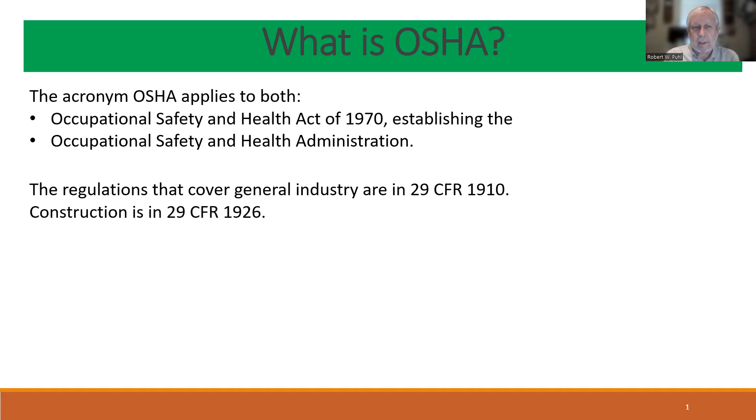The regulations that cover general industry are in 29 CFR 1910. Construction is 29 CFR 1926.

This means Title 29, Code of Federal Regulations, Part 1910, which is then divided into 20 subparts, A, B, C, etc. But usually the subparts aren't used in citing a regulation.

It's usually just 29 CFR 1910.147, the control of hazardous energy lockout tagout, for example, or just 1910.147. Any subpart, like Subpart S, is electrical.

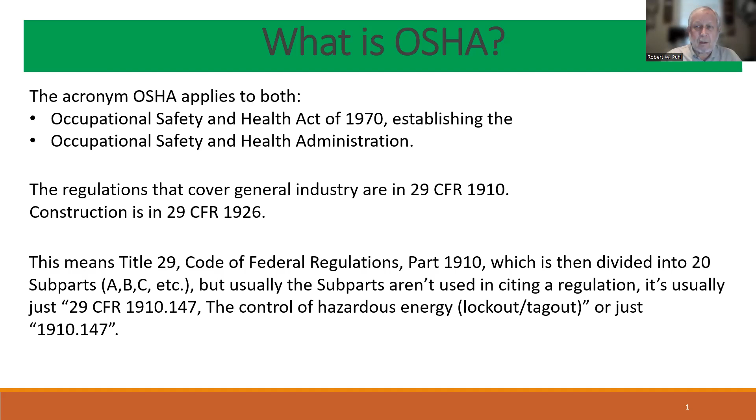So somebody might say, oh yeah, Subpart S, that's electrical. But generally speaking, the subparts aren't used that often.

Most of the time, safety professionals will deal with OSHA in two ways: OSHA regulations, many of which we'll cover in detail in this course, and OSHA inspections.

OSHA inspections are things that we just have to put up with. Again, they're not good or bad, they're just there and there for a reason. So if you have an OSHA inspection, you just have to deal with it.

Now, if you put a hard hat up to your ear, you can hear the OSHA. Maybe not.

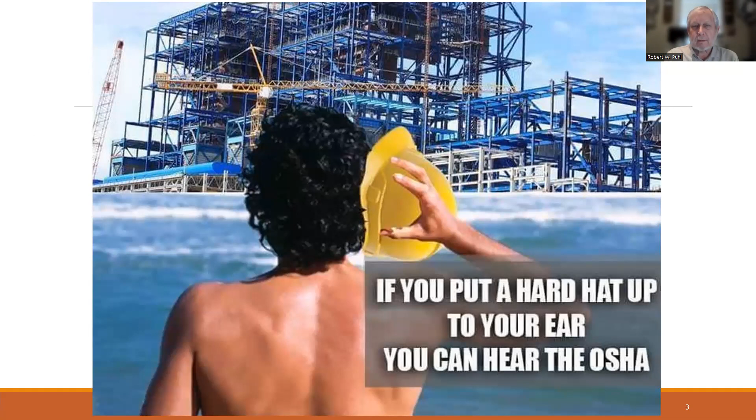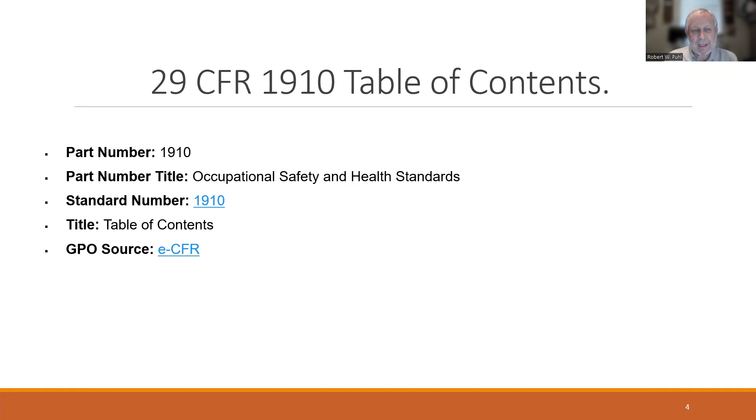So this is the 29 CFR 1910 table of contents. This is the part numbers, 1910. The part number title, Occupational Safety and Health Standards, is standard number 1910. And this is some other gobbledygook down here, table of contents in eCFR.

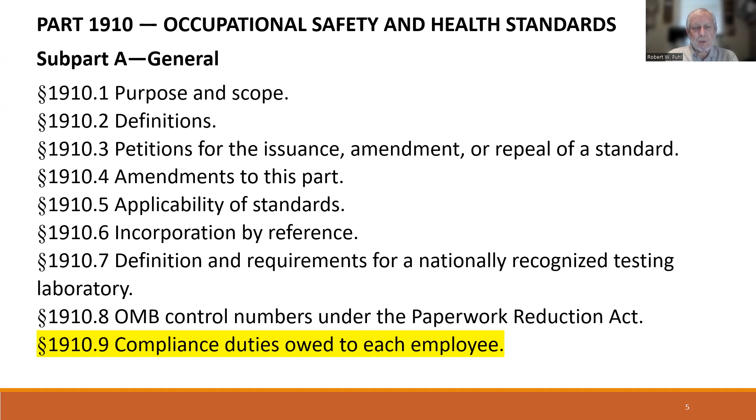So Part 1910, Subpart A is General. I'm not going to read all of this, but there's this compliance duties owed to each employee, which I thought was interesting. This is the whole 1910.9.

1910.9, paragraph A, personal protective equipment: standards in this part requiring the employer to provide personal protective equipment, including respirators and other types of PPE, because of hazards to employees, impose a separate compliance duty with respect to each employee covered by the requirement.

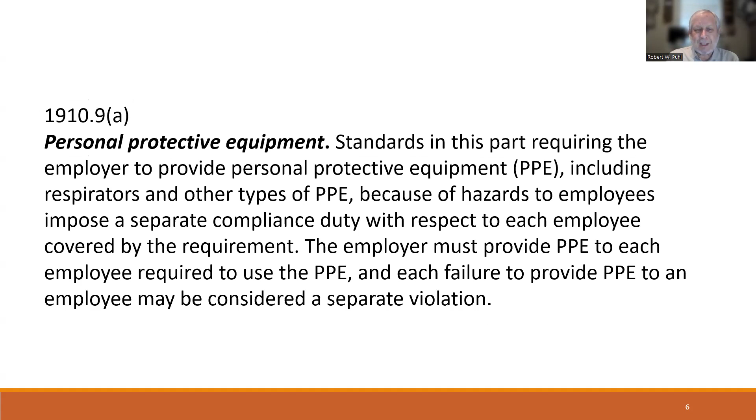The employer must provide PPE to each employee required to use the PPE, and each failure to provide PPE to an employee may be considered a separate violation.

Now, training. This is still 1910.9, paragraph B. There are only two paragraphs in it. Standards in this part requiring training on hazards and related matters, such as standards requiring that employees receive training, or that the employer train employees, provide training to employees, or institute or implement a training program, impose a separate compliance duty with respect to each employee covered by the requirement.

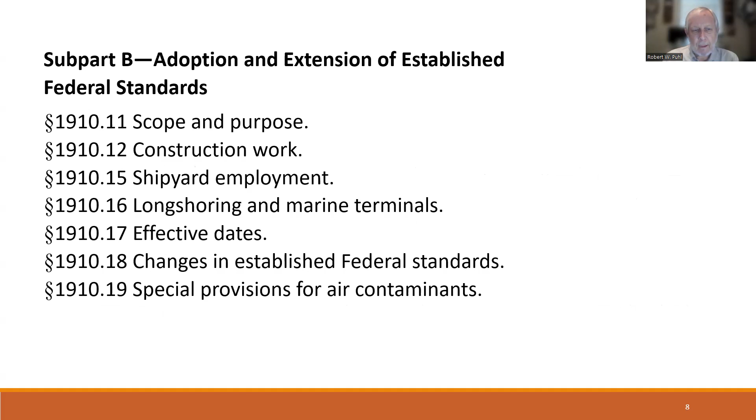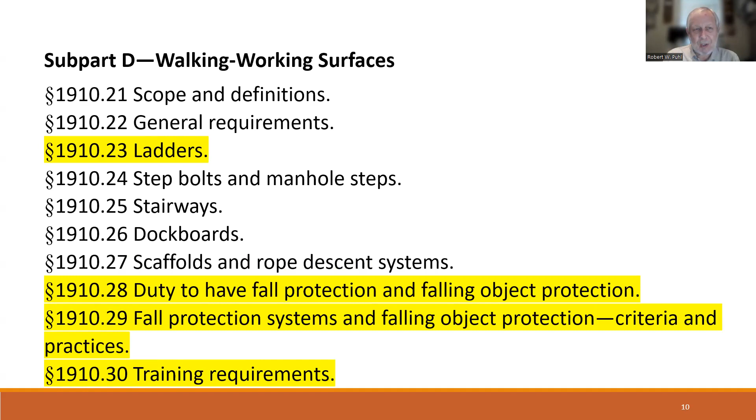Subpart F covers powered platforms, man lifts, and vehicle mounted platforms. Man lifts are kind of obsolete now. You only have one if it's grandfathered in. A man lift is one of those things you stand on - it's a belt that goes from the ceiling to the basement, like a 1 foot by 2 foot piece, and you hang onto it. They have one at the Fort Smith feed mill, and the people who work there all the time love it. I've ridden it a couple times, and it's not my favorite thing to do.

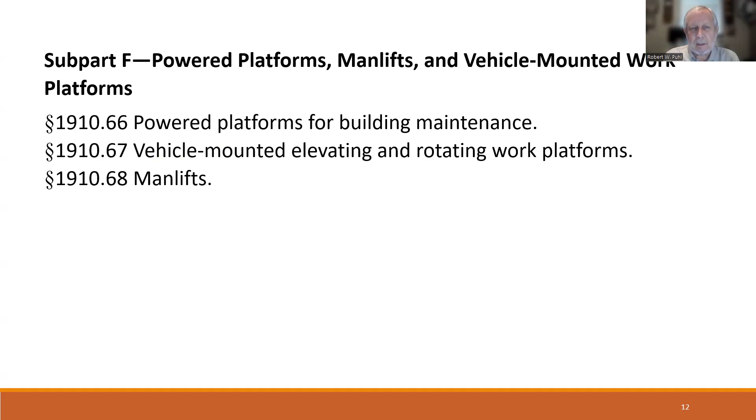G, occupational health and environmental control. We're going to look at occupational noise exposure in that one later on.

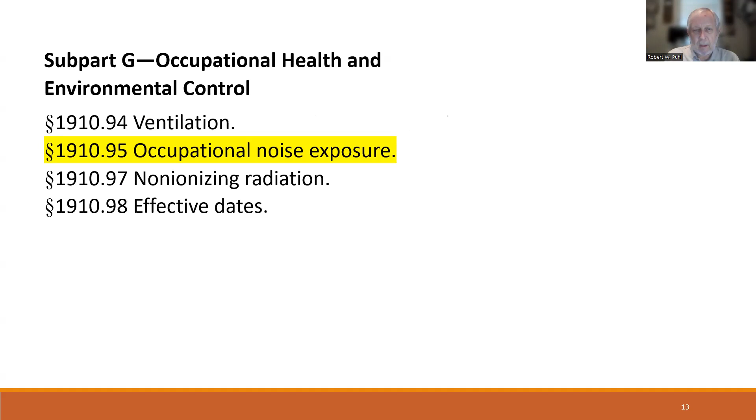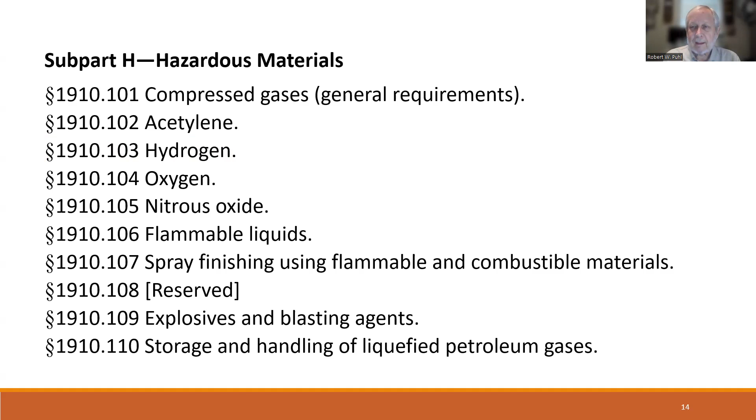Hazardous materials, H. There's a lot of hazardous materials. Oxygen, how about that? Oxygen is a hazardous material. Without it we die, but we need it, but it still could be a hazardous material.

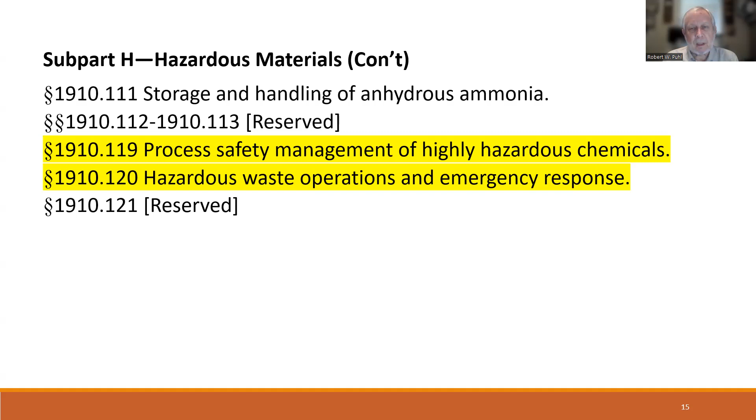Part of this is 1910.119, process safety management of highly hazardous chemicals, and 1910.120, hazardous waste operations and emergency response. These are two very powerful standards. The process safety management standard, I like it, I like the way it's written - it's really succinct, it gets to the point. But the hazardous waste operations one, oh my God, that's all over the place. There's a lot of stuff in that one.

J, general environmental controls, permit required confined spaces - very important standard. Then control of hazardous energy, lockout tagout. To me, that is probably the best OSHA standard they've ever come up with. The theory is impeccable, and if it's put into place, you can almost guarantee nobody's going to get hurt because somebody went and started up a machine that somebody was working on.

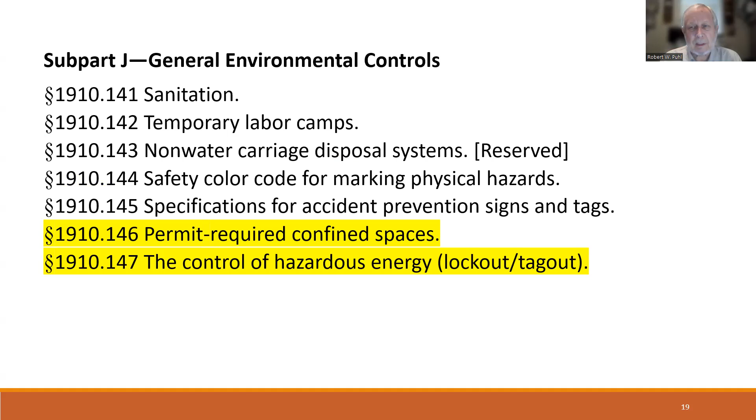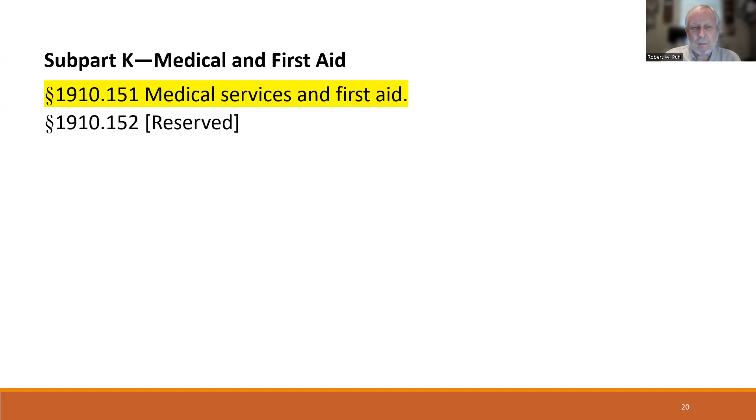Medical services and first aid - we might hit that, I'm not sure, but that's just a little bit about what you should have in your first aid kit. Everybody usually wants to know that.

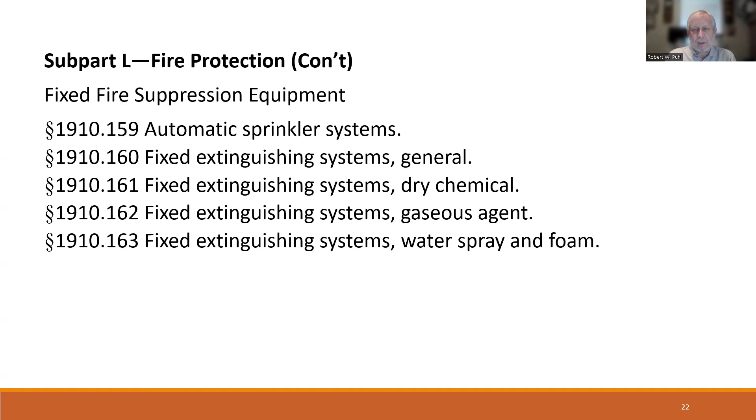Fire protection, we cover that more in fire science too. Fire suppression equipment, fixed fire suppression equipment, automatic sprinkler systems, etc. Those are automatic sprinkler systems required by an OSHA standard. You have NFPA for the main, big ones that are going to cover your building - that's covered under NFPA. And there's other fire protection systems.

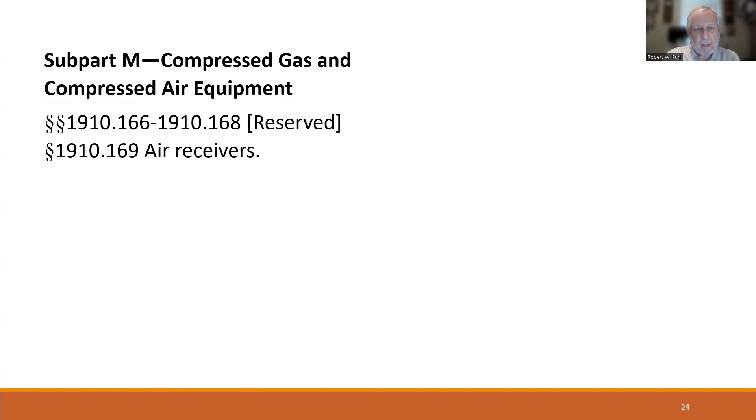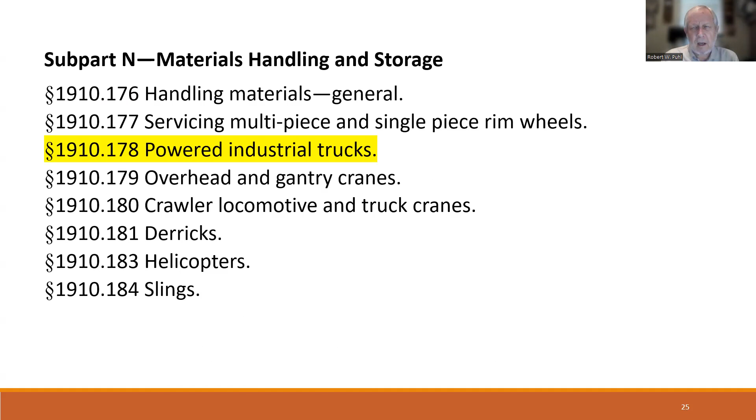Compressed gas and compressed air. Materials handling and storage, powered industrial trucks - we all know those as forklifts, and we will touch on that. It's an important standard, a good standard too. General requirements for all machines under machine guarding - we'll hit that, it's not very big.

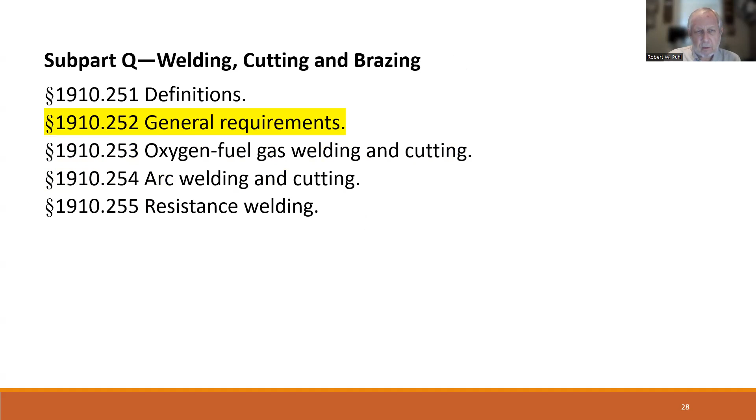Subpart P, hand and portable powered tools, another hazardous equipment area. In general, guarding of portable powered tools - we'll touch on those. Welding, cutting, and brazing, 1910.252, general requirements on that. That's important as well.

There's some stuff for special industries, R, and there's S - S is all electrical, and we'll touch on that too. Commercial diving operations, that's too specialized, I'm not going to worry about that. U through Y are reserved. And what about Z? Oh, there it is.

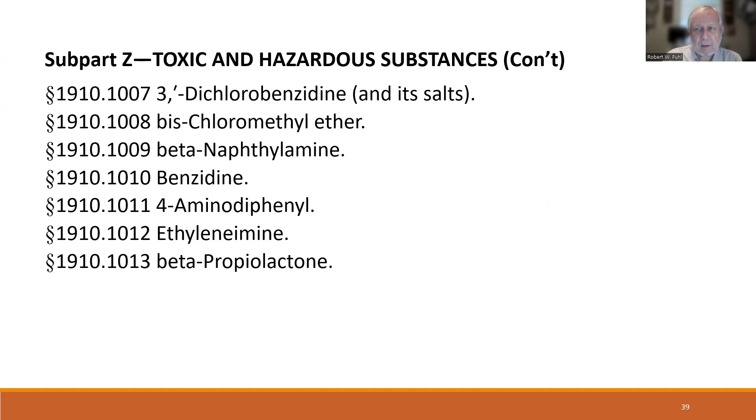Toxic and hazardous substances, okay. 1910.1000, air contaminants, asbestos, a bunch of stuff there. All kinds - well, they're hard to pronounce, and they're probably pretty hazardous. So a lot of stuff in there.

Chromium VI, that's hexavalent chromium - VI being 6, hexavalent. That's given off when you're welding stainless steel, among other things. That could be bad. Bloodborne pathogens is a standard that's good to know about - that's an important standard too, especially if you're in the medical industry or dealing with anybody that might be injured.

Then 1910.1200, hazard communication. Now, hazard communication is covered in a couple other places in these courses, in certain different classes that I teach, and that's good because it's a very misunderstood standard. It's really an important one too. There's so much authority gobbledygook on that, and then there's some definitions they put in here.

Incorporated by reference, 1926 - this is obviously construction, but they're going to say that any other standards of agencies or organizations which are not agencies of the U.S. government, such as NFPA or ASTM, have the same force and effect as other standards in this part.

So only the mandatory provisions which contain the word 'shall' or other mandatory language of standards incorporated by reference are adopted as standards under the Occupational Safety and Health Act. The location where the standards may be examined are as follows.

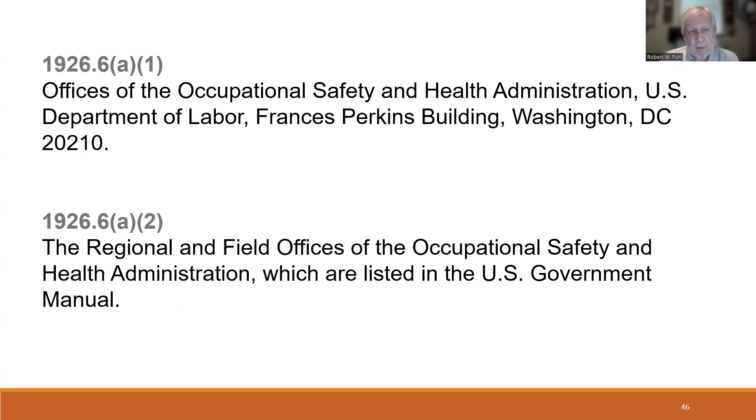So there you go. If you're worried about that, you can go to Washington, D.C., or the regional field office of the Occupational Safety and Health Administration. They're listed in the U.S. government manual. I bet if you go there, they won't know what you're talking about.

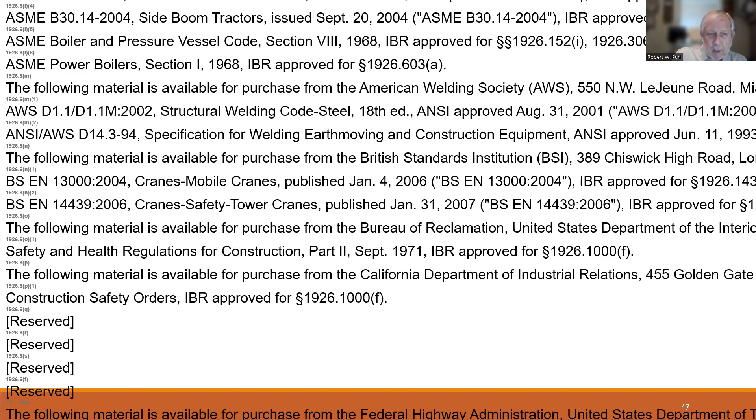And these are some of them. ASME. There's a ton of them in here. So that's just to kind of give you an idea, I'm not going to go through all of them.

Point is, if an OSHA employee claims something is incorporated by reference, look it up. It may not be. They may be wrong. But if an OSHA employee tells you something, look it up anyhow.

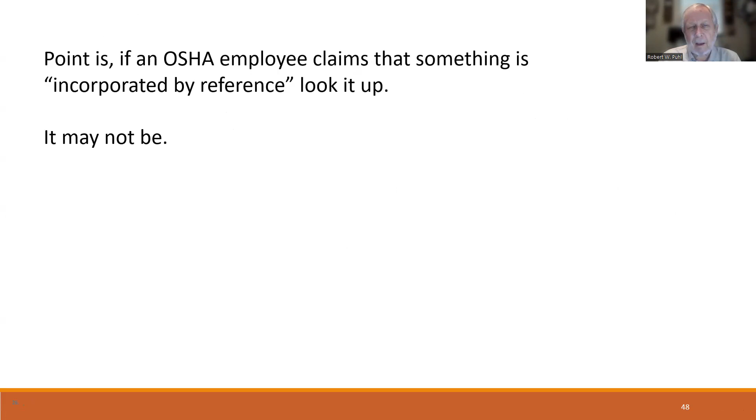Okay, general duty clause. You're going to hear this a lot. 5A1, or the general duty clause. Section 5 duties: each employer shall furnish to each of his employees employment and a place of employment which are free from recognized hazards that are causing or likely to cause death or serious physical harm to his employees. And each employer shall comply with occupational safety and health standards promulgated under this act.

Now, where they'll use this one most of the time is if they find something in your facility that they don't like, and it's not in that 2-inch thick book of OSHA regulations, they'll use the general duty clause. And that kind of rankles me a little bit. If it was that important, you're going to write me up for it. Why don't you put it in the book?

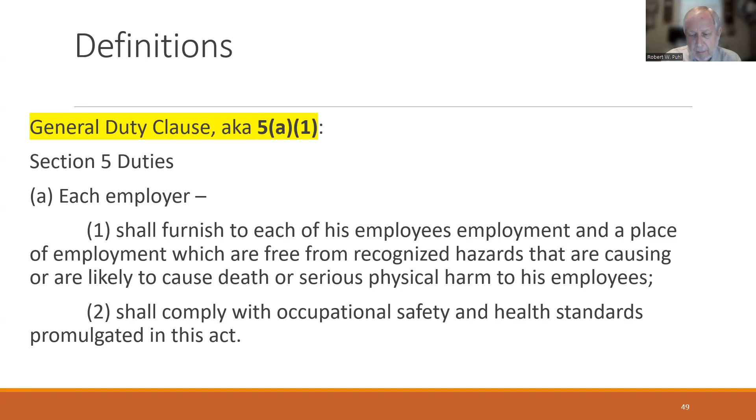And also, if I comply with all these regulations in this 2-inch thick book, and they're all okay, and you're going to get me on something like this. I don't like that. I think if it's important, you should put it in the book, but that's the way it is. And I get where they have to have a catch-all because you can't cover everything too.

So the general duty clause, or 5A1, will be used by OSHA to issue a citation for something that isn't covered in all their regulations. So just because you can't find a specific regulation that covers something unsafe doesn't mean you won't be cited. If it's unsafe, regulation or no, you should still deal with it.

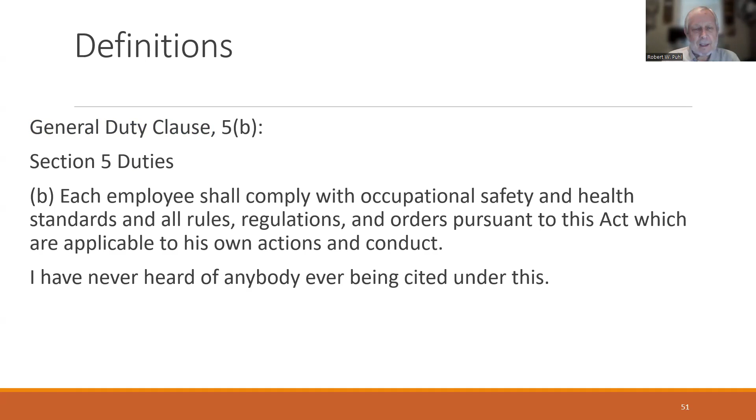So there's a 5B that nobody ever talks about. Section 5 duties, 5B says each employee shall comply with occupational safety and health standards and all rules, regulations, and orders pursuant to this act which are applicable to his own actions and conduct. I have never heard of anybody ever being cited under this. So not only must each employer do it, each employee must do it too. You might want to have that in your back pocket just in case you need it someday.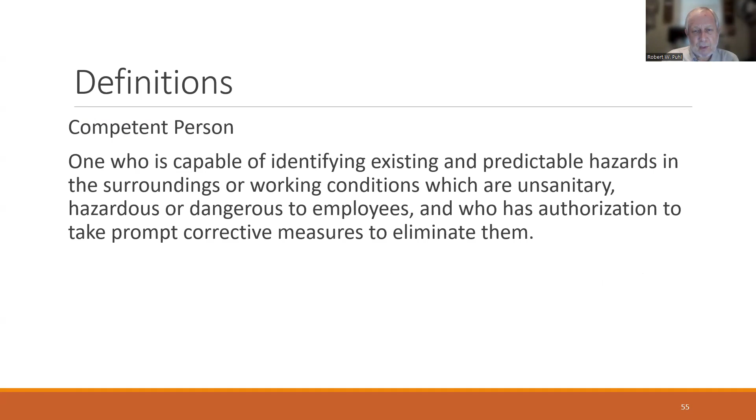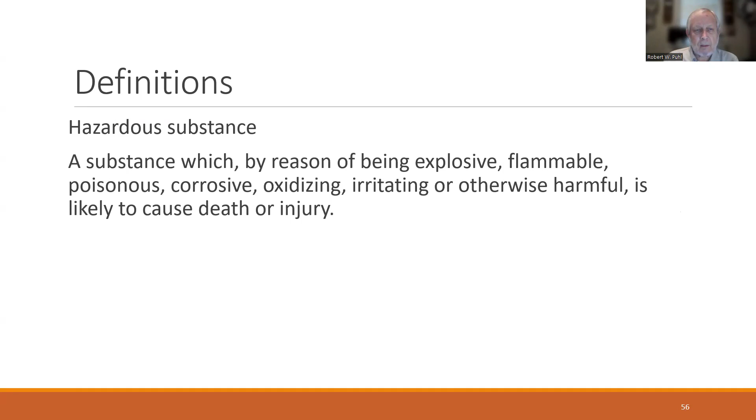They have to have the authorization to take prompt corrective measures to eliminate these hazards they find. Hazardous substance is a substance which, by reason of being explosive, flammable, poisonous, corrosive, oxidizing, irritating, or otherwise harmful, is likely to cause death or injury. I think we agree with that.

Qualified is one who, by possession of a recognized degree, certificate, or professional standing, or who by extensive knowledge, training, or experience, has successfully demonstrated his ability to solve or resolve problems relating to the subject matter of the work or the project. So some places in OSHA they say a qualified person. Usually a qualified person is one who the company claims is, or says is, qualified. And I don't know how else you could do it, to be honest with you.

ANSI, American National Standards Institute, founded in 1918. That's a private nonprofit organization, administrator and coordinator of the U.S. private sector voluntary standardization system.

ASME, American Society of Mechanical Engineers, founded in 1880. That's a private not-for-profit membership organization. Promotes the art, science, and practice of multidisciplinary engineering and allied sciences around the globe.

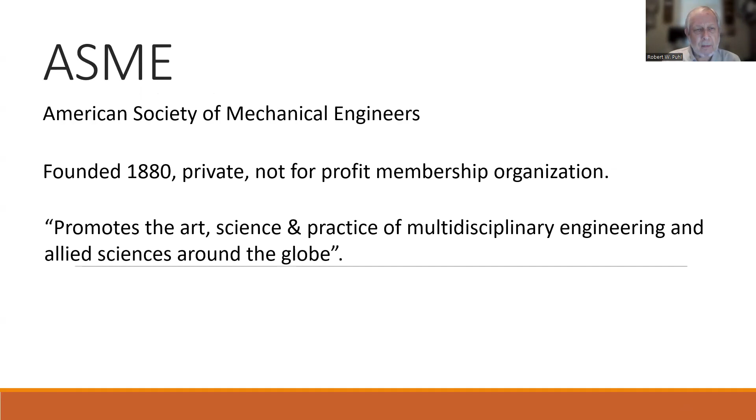ASTM, American Society for Testing and Materials, ASTM International, founded in 1898, private not-for-profit membership organization. When I was in California in charge of the geotextile programs, we had ASTM standards, and I was a member of the ASTM for a while. I remember D4632 was the tensile strength one, and that's the one I had practically memorized.

It's a membership organization, develops a wide variety of standards. I was a member in charge of geotextiles and used their test methods.

BLS, Bureau of Labor Statistics, part of the United States government, Department of Labor, creates a wide variety of statistics, including accident statistics useful to safety professionals. We'll get into more details on BLS when we talk about OSHA recordables, that type of thing.

CIH is a certified industrial hygienist, certified by the American Board of Industrial Hygiene, demonstrated knowledge and all kinds of stuff. So it's one of those certifications by a private organization.

Certified safety professionals, kind of the same thing, certified by the Board of Certified Safety Professionals, must pass a series of tests.

All right, I'll turn it off. I was never big on the ones where people, you see these people have all these letters after their name. I think they spend more time doing that than doing their job. I was too busy at work to be doing this type of thing, to be honest with you.

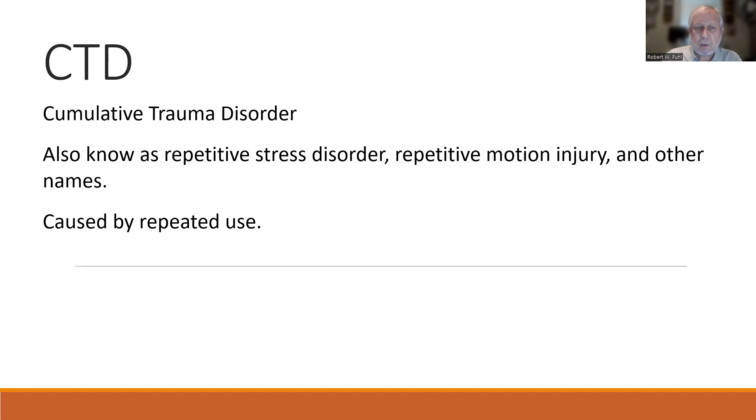CTD, cumulative trauma disorder, also known as repetitive stress disorder, repetitive motion injury, and there are other names for it. Caused by repeated use, cumulative, meaning traumas that build up over time.

dB is a decibel. It's a logarithmic unit of measurement of noise. Logarithmic means if you go from one number up to the next number, it's times 10.

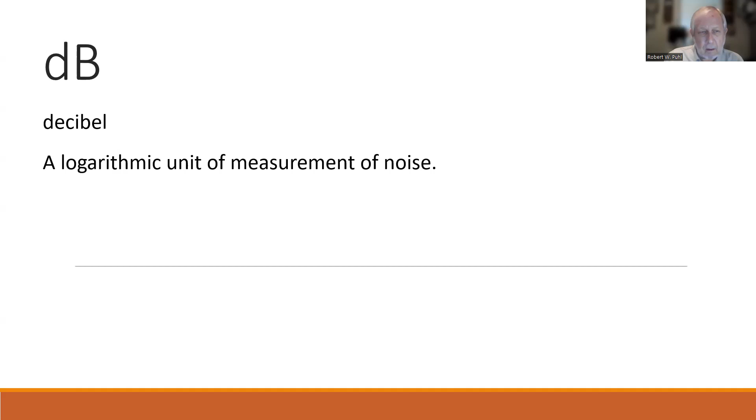DOT, Department of Transportation, is a federal government body. If you just say DOT, that's a little confusing because every state has a DOT also. I don't know what they call them here, but they're usually referred to by acronyms like OKDOT. California does it differently - they call theirs Caltrans, California Department of Transportation. That's a pretty good way to do it, I think.

EPA, Environmental Protection Agency, federal government institution, of course. Now, there's one thing that EPA and OSHA agree on, and that is 1910.119, process safety management. That standard is unique in that it's almost identical in both organizations, except every part of OSHA's standard says the employer shall, and in EPA it says the owner or operator shall - otherwise it's identical. You can be inspected under it by either one if you're under process safety management. We were inspected at OK Foods at each facility by EPA, never by OSHA, for that.

GFCI, ground fault circuit interrupter, one of the best creations ever made, I think. It's a safety device that shuts off the flow of electricity before it can harm a person.

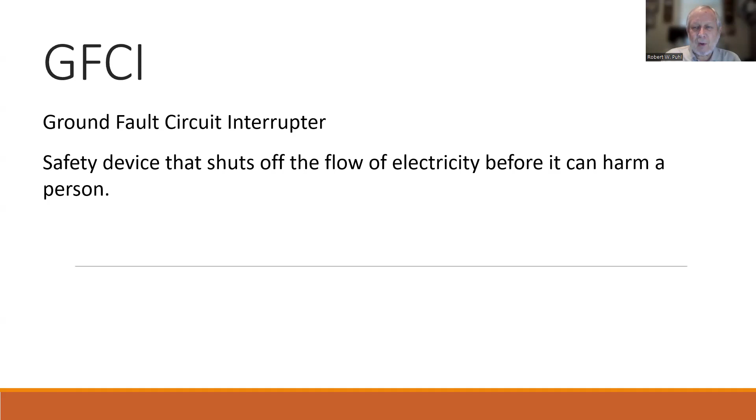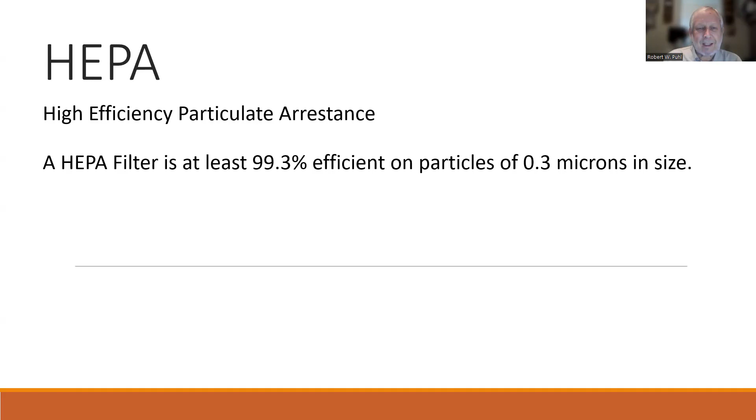HEPA, high efficiency particulate arrestance. It's a filter that's at least 99.3 percent efficient on particles of 0.3 microns. That's pretty small in size.

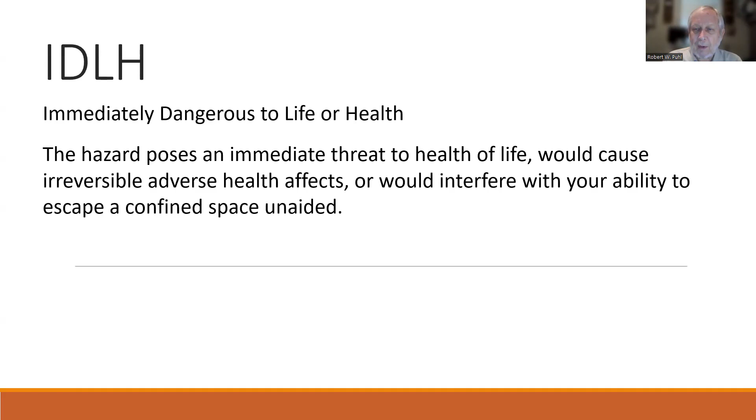IDLH, immediately dangerous to life or health. The hazard poses an immediate threat to health or life, would cause irreversible health effects, or would interfere with your ability to escape a confined space unaided. That's interesting how they phrase that.

And mnemonic has to do with memory. A mnemonic is something you use to help you remember something, like Roy G. Biv. What's that for? Red, orange, yellow, green, blue, indigo, and violet - the colors of the rainbow. You know Roy G. Biv, you know the colors of the rainbow. That's a mnemonic. And my mnemonic is IDLH is 'I don't live here.'

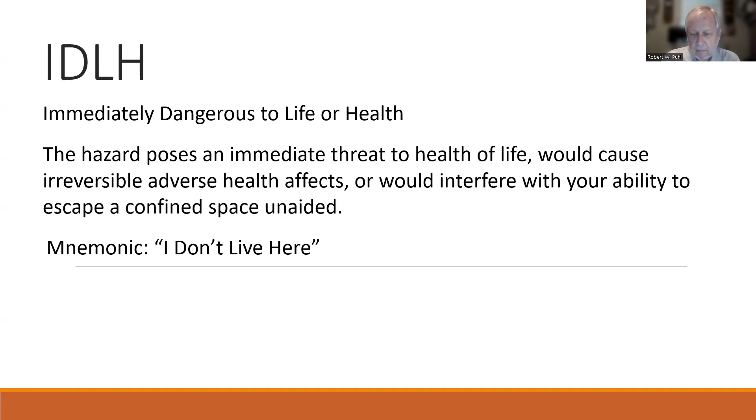JHA or JSA, job hazard analysis or job safety analysis, breaks a job into the smallest tasks and addresses the safety aspects of each task.

LOTO, lockout tagout, is a program required by 29 CFR 1910.147, the control of hazardous energy. I don't like the term lockout tagout, because tagout is rarely used and really shouldn't be, since according to the standard, if it can be locked out, it must be locked out. Tagout is only used when lockout isn't possible, because I think when OSHA first came out, there weren't as many places to lock out as there are now—now lockout has to be built into things. So tagout is just a warning device. It's not nearly as effective as lockout.

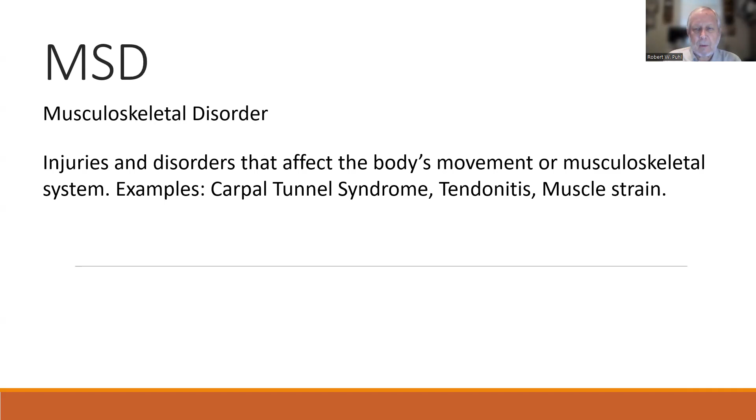MSD, musculoskeletal disorder: injuries and disorders that affect the body's movement or musculoskeletal system. Examples include carpal tunnel syndrome, tendonitis, and muscle strains.

MSDS, material safety data sheet—that's the old term for SDS, safety data sheet. So old codgers like me will still forget and call it MSDS sometimes. It's the same thing as the SDS, so don't let that confuse you.

MSHA is the Mine Safety and Health Administration. It's the federal government body that concerns mine safety—essentially, it's the OSHA for miners.

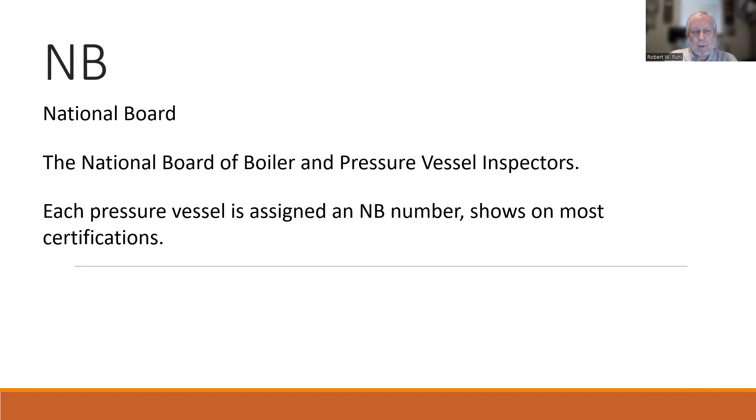NB is the National Board of Boiler and Pressure Vessel Inspectors. Each pressure vessel is assigned an NB number, which shows on most certifications—though sometimes it doesn't, but it's stamped on there somewhere. We had a vessel at OK Foods, during an inspection by the boiler inspector, that didn't have a nameplate on it. I don't know how that happened or how long it was without one. So we had to go to the NB and get one.

This was a pretty detailed process you had to do. You had to take a pencil and paper and make a shadow, or outline, of whatever was on the vessel. Then you had to send that to the National Board. The National Board would determine where that vessel came from based on the information you gave them, and they would make another nameplate. They wouldn't send it to you directly—they'd send it to a third party, who would come and oversee it being installed. That's actually a pretty good idea, because this way you just can't fake it and get a new nameplate for yours.

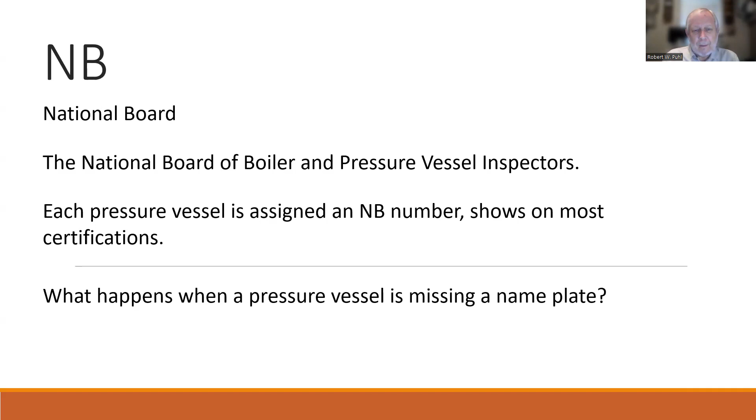It should be a big deal if one of these nameplates is missing, because that's serious. The nameplate tells you the MAWP, the maximum allowable working pressure. If you don't know that on any pressure vessel, then you're an idiot—pure and simple. Why would you use a pressure vessel if you didn't know the maximum allowable working pressure on that vessel? You're an idiot. What happens when a pressure vessel is missing a nameplate? Well, I just told you.

NFPA, National Fire Protection Association, is the leading information and knowledge resource on fire, electrical, and related hazards. It's a big organization that does a lot of great stuff, and develops codes such as the NEC, which it sells.

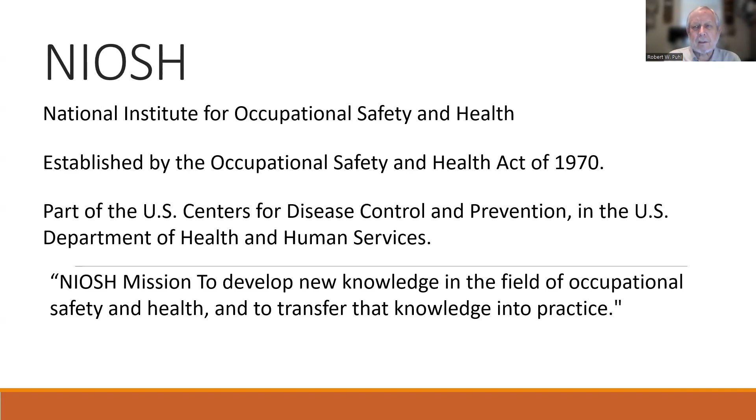NIOSH, National Institute for Occupational Safety and Health, was established by the Occupational Safety and Health Act of 1970, which is OSHA. It's part of the U.S. Centers for Disease Control and Prevention, within the U.S. Department of Health and Human Services. NIOSH's mission is to develop new knowledge in the field of occupational safety and health and to transfer that knowledge into practice. NIOSH generally writes the regulations that OSHA enforces.

NRR is the noise reduction rating, the amount of noise reduction provided by hearing protection—we'll talk more about that later. It should be indicated on the product or its packaging.

OSHA comes from the Occupational Safety and Health Act of 1970, or the Occupational Safety and Health Administration. It's the federal government agency, but states can have their own agency too—there are 26 states that have their own OSHA. Its mission, with these two purposes, is to assure safe and healthful working conditions for working men and women by setting and enforcing standards, and by providing training, outreach, education, and assistance.

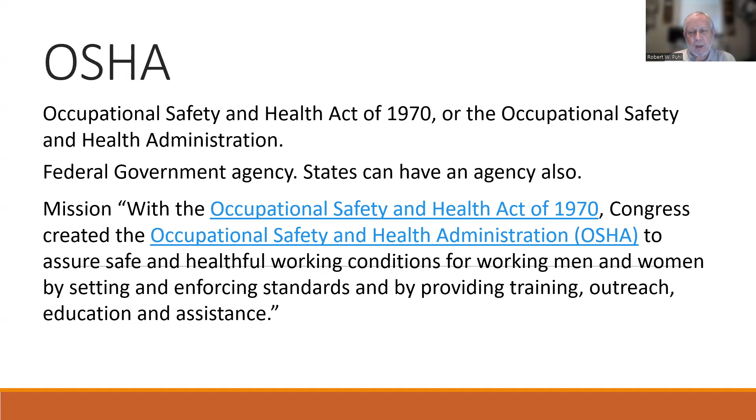See that? OSHA-approved? These people are full of crap, they don't know what they're talking about. Don't buy anything from them. ANSI-compliant may be true, but OSHA-approved is a lie. OSHA does not approve any product, okay? If a salesman tells you this is OSHA approved, they're lying. Kick them out.

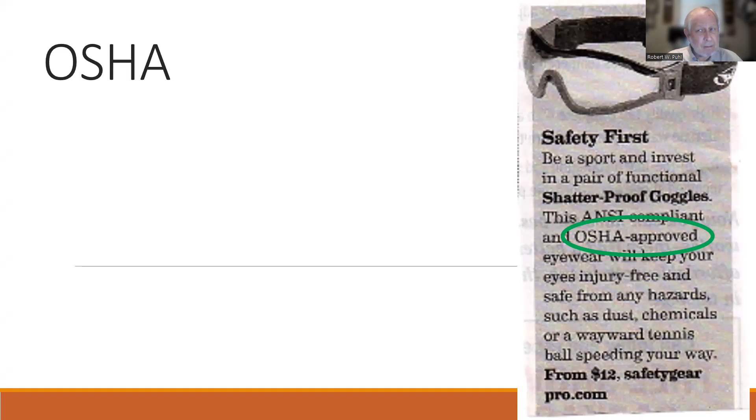I would never buy from whoever this is, safetygearpro.com, whoever that is. OSHA approved is a lie. And if their product isn't good enough, they can't sell to you without lying about it. There's a problem there. So OSHA approved is not factual. OSHA doesn't approve anything, they write and enforce safety standards. The statement means they think you are too dumb to know this. They're lying, or they don't know what they're talking about.

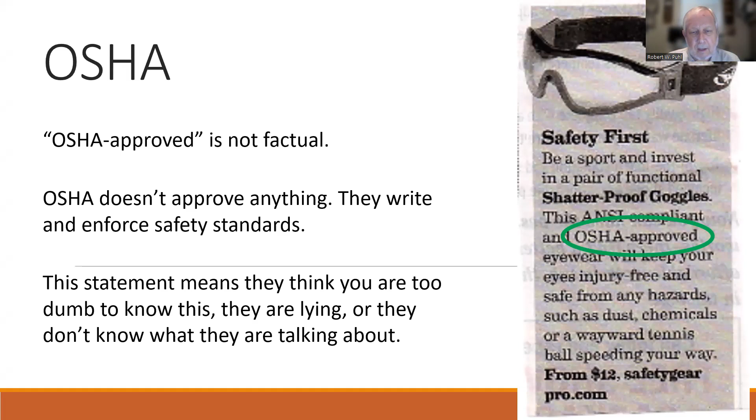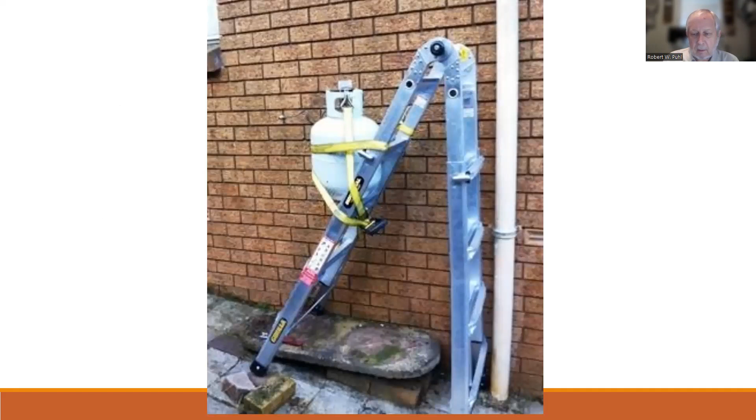PIT, powered industrial trucks, forklifts, powered pallet jacks. Everybody else calls them forklifts, but OSHA calls them powered industrial trucks, powered industrial equipment. And there's a good picture of something you don't see very often. There's a ladder, and they're strapping on a propane tank to it. Why, I don't know. It's not the right way to carry a propane tank, I'll tell you that. And it looks like propane.

PPE, we all know what that is, personal protective equipment, last line of defense in the hierarchy of controls. And you're going to hear hierarchy of controls from me a lot. It doesn't remove or abate the hazard, but properly used it protects employees from the hazard.

SCBA, self-contained breathing apparatus. SCUBA is self-contained underwater breathing apparatus, so scuba gear is for underwater, but SCBA is mostly used by firefighters or emergency responders.

SDS, safety data sheet, a document used by manufacturers of chemicals to communicate the safety, handling, storage, etc. of such chemicals. Used to be called MSDS.

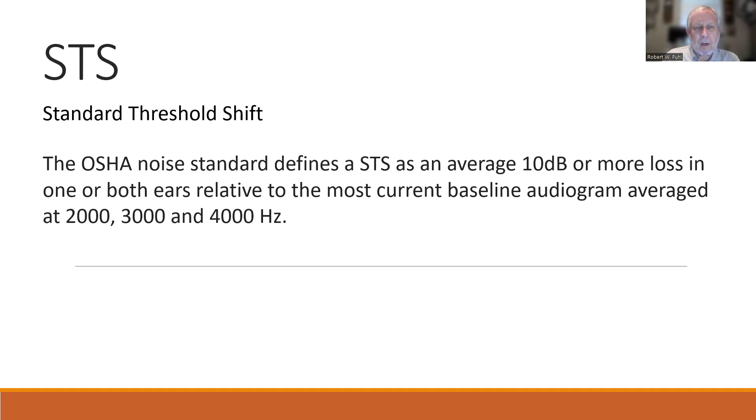STS, standard threshold shift. The OSHA noise standard defines an STS as an average 10 decibels or more loss in one or both ears relative to the most current baseline audiogram, averaged at 2,000, 3,000, and 4,000 hertz. You don't need to know all that stuff. If you're having hearing protection testing done for you, they'll know what this is, but you need to know what it is - that's what a standard threshold is, but you don't need to define it.

TWA - that's an old airline out of business, Trans World Airlines. Oh no wait, it's time-weighted average, excuse me. Exposure, usually to a hazardous chemical or noise, averaged over 8 hours.

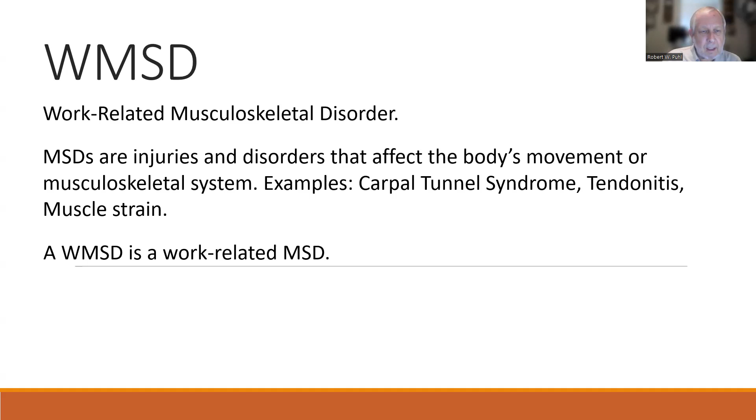WMSD, work-related musculoskeletal disorder. MSDs are injuries and disorders that affect the body's movement or musculoskeletal system. Example: carpal tunnel syndrome, tendonitis, muscle strain. WMSD is a work-related musculoskeletal disorder, in other words, one that happens at work.

Now here's a couple of words you may or may not know. Proactive means acting in anticipation of future problems, needs, or changes. Reactive is occurring as a result of stress or emotional upset, or after the fact. They say most OSHA regulations were written in blood, which means somebody got hurt, and that's why they wrote a regulation about it. And there's a lot of truth in that.

So of these two things, which is best regarding safety? Well, obviously, we try to be proactive. How do we be proactive? We try to make sure people are trained. We look for hazards and try to get them taken care of in anticipation, so nobody gets hurt. It's always better to have people not get hurt than have to clean up after that.

So that's all, folks. One more question - the one I love to ask when I'm asked if there are any questions, which I'm not going to ask here, obviously, because this is online. When somebody says, hey, any questions? I say, yeah, what's the capital of South Dakota? And they never know. And you know what, you probably don't know either, and I'm not going to tell you. So you better know it, because I might ask it of you - you never know.